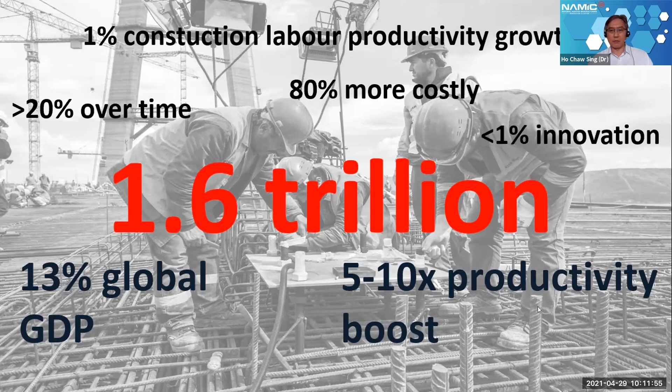While there are barriers to higher productivity, ways of overcoming them have been known for some time. Most companies, just like any in other industry sectors, generally lack both the incentives and the skill to change. However, there are forces that are lowering the barriers for change, such as rising requirements, increased demand in terms of volume, cost, and quality, disruptive new entrants, more readily available new technologies such as prefabrication or precast technology, new materials, as well as automated processes such as concrete 3D printing, and of course, increasing cost of labor with partial restrictions on migrant workers.

One of the solutions for the industry is to move toward an automated manufacturing production system that would boost productivity up to 10 times, potentially. Construction or concrete 3D printing has progressed rapidly in the last few years.

Construction 3D printing offers the following: it facilitates greater off-site manufacturing, vastly reducing on-site construction. It enables modularization and standardization of construction processes. And most importantly, it requires less workforce in a more controlled and safer factory environment.

In Singapore specifically, efforts have been underway in the last few years to explore the adoption of this technology as part of the digital transformation that is now rapidly changing the landscape for most of our major industry sectors. On this note, I just want to thank again all our distinguished speakers today for being here with us to share their insights on the pathway towards adoption of construction 3D printing technology.

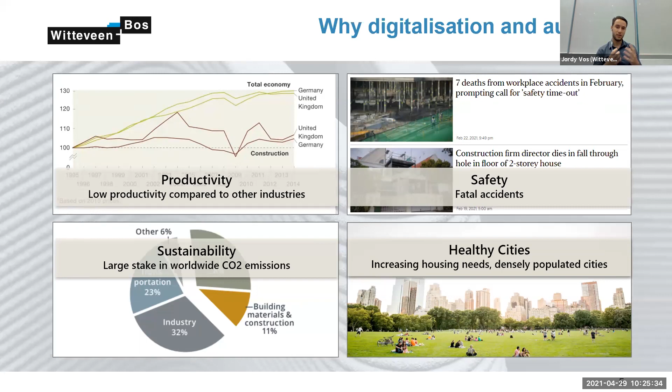There is an increasing need for housing worldwide, and increasingly densely populated cities. So we need to create more healthy cities where it's pleasant for everyone to live. And 3D concrete printing is a great solution because it can help solve many of these challenges.

It's an automated construction method with a high amount of productivity. There's less human involvement needed, which helps greatly to increase safety.

It is a technology that makes use of material in a very efficient way, and therefore it's a sustainable construction technology. Also, we don't need formwork, for example, which allows us to create more freeform shapes and more pleasant and appealing cities for everyone to live in.

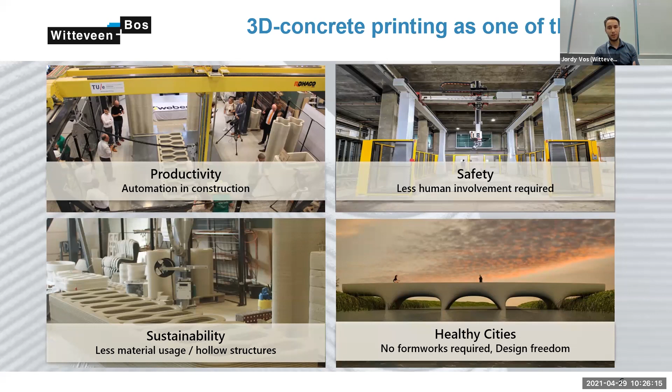So let me give you a quick introduction to how 3D concrete printing works, for those who haven't seen the technology yet. First of all, 3D concrete printing is a robotized technology. It's basically a robot that is moving a printhead, and it can be all kinds of robots actually. I'll show some examples later on.

This printhead is extruding concrete that comes from a mixing pump, building up a concrete object layer by layer. This is all controlled by a robot controller, and the robot controller receives input from the digital designs that we, as an engineering firm, create.

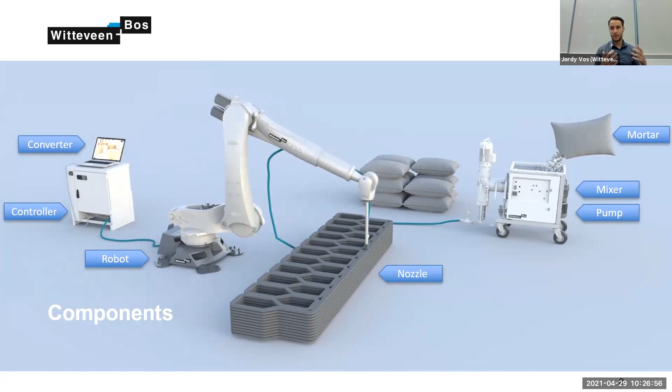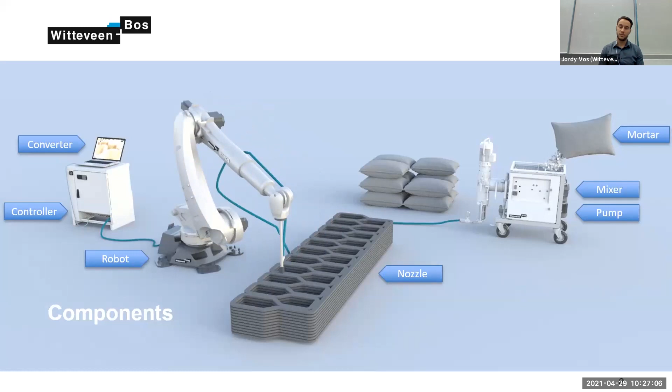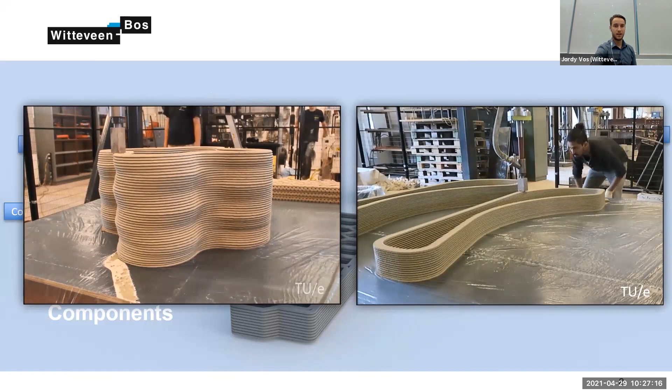So we have created a full digital workflow from the digital designs of the buildings, all the way up to something these robotic systems can read. And if you do that correctly, it looks something like this—we can print complex shaped objects layer by layer, hollow structures, in a fully automated way.

So why is 3D concrete printing sustainable and smart? Well, let's have a look at the traditional way of doing construction. We are looking here at a typical workflow to construct, for example, a concrete wall.

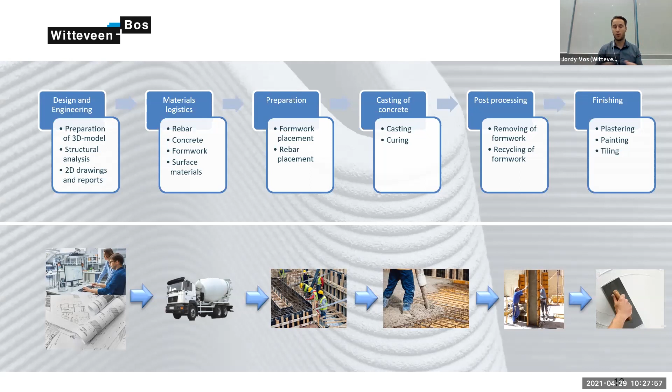This is an even more simplified version of it, but just to give you an idea, there are a lot of different steps to go from this design to a finished product. All those steps require a lot of manual work, a lot of what I call analog work. It's not digital. Moreover, it's done by a lot of different people who all have a different skill set to do these steps.

So, summarized, it's a very segregated process with a lot of failure cost in between because the processes don't connect well to each other. Also, because all those steps are still very manual, it's labor intensive and not human friendly. And because we make use of, for example, formwork, we have a lot of material waste.

If you look at the 3D concrete printing process, it's a very smart way of doing manufacturing because it's a much more simplified, integrated and connected process, where we go way faster from design to the actual manufacturing process with way less manual and analog steps in between.

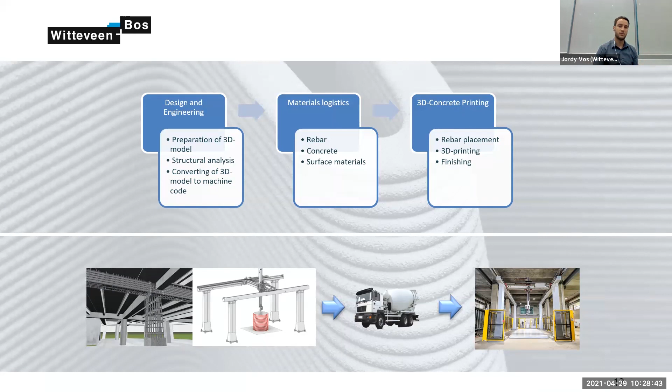So this is what you can imagine the future of 3D concrete printing to be, where we have 3D concrete printing systems that don't only do the printing, but also all the additional steps needed to reach that end product—think about the placement of reinforcement, surface finishing, painting, tiling, and so on.

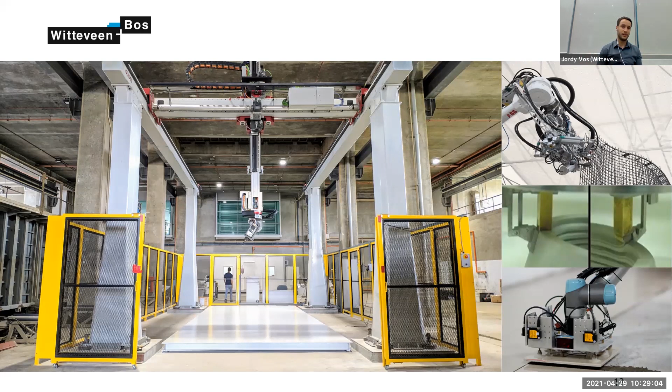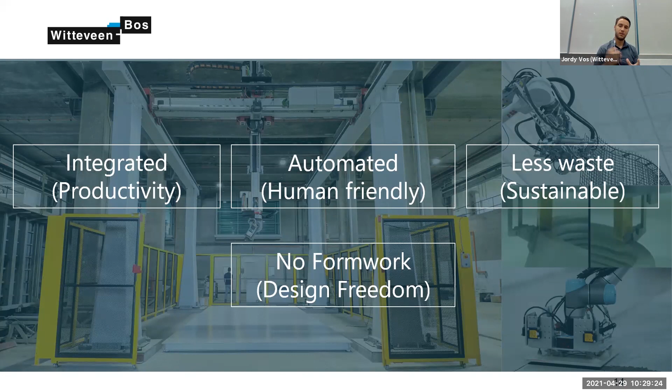That process is fully integrated, which helps greatly to increase productivity. It's automated, which helps create a more human-friendly way of doing construction, and it's very sustainable because there's barely any material waste. And because we don't need formwork, we have way more design freedom, and it helps create healthier cities.

So let's zoom in a little more on the manufacturing of housing. What are the benefits of 3D concrete printing for housing? I will go through four benefits. If you know more benefits, feel free to drop them in the chat.

First of all, like I just mentioned, it's a highly automated way of doing manufacturing. This helps a lot to produce houses faster, with less labor and less raw materials needed, with all the advantages I just mentioned.

But it can also help a lot to create lightweight building components, as you can see here on the screen, which again helps reduce materials. This is really needed to create those cities, to help accommodate the increased housing need worldwide.

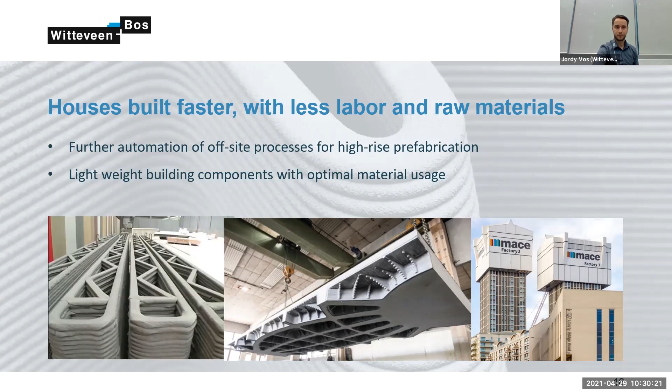3D concrete printing has great design freedom, which helps to create shapes for houses or buildings that blend in better with green and natural environments, avoiding pure concrete cities. That is a more pleasant environment for everyone to live in. On the left you see one of our visions of how 3D concrete printing can be applied in high-rise buildings, and on the right a hotel in Singapore which isn't produced with 3D concrete printing, but if you look closely it actually looks like it is.

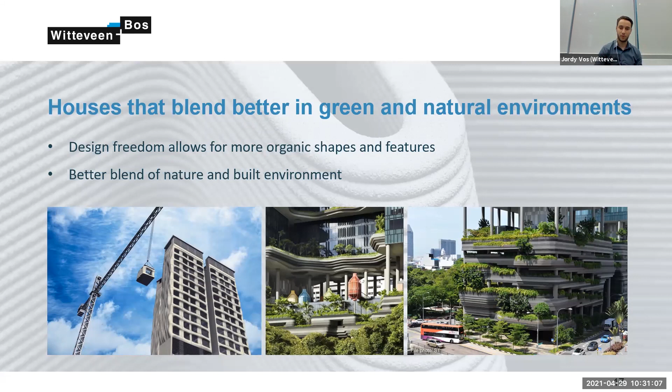So 3D concrete printing can really be used as an architectural feature in building designs. Besides that, it's a great method for design freedom. We don't need formwork that you have to repeat to earn back, and that gives us the possibility to create tailor-made houses. I think this mainly works for lower-rise, one-off buildings.

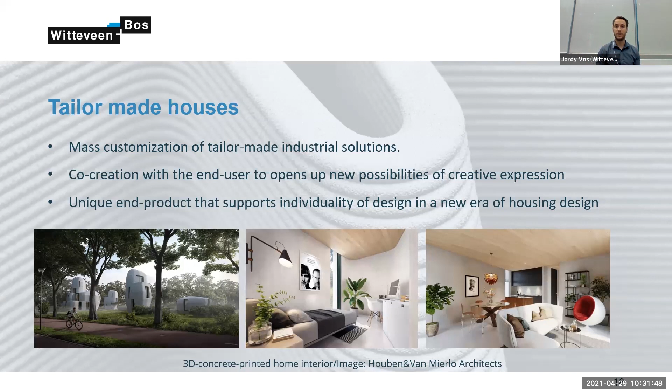But this really helps everyone express their creativity and create that one house they would love to live in. Tomorrow is our press release for the Milestone House in the Netherlands, where the first house is being constructed, and that will be a house where someone can really live - an approved load-bearing structure, for example.

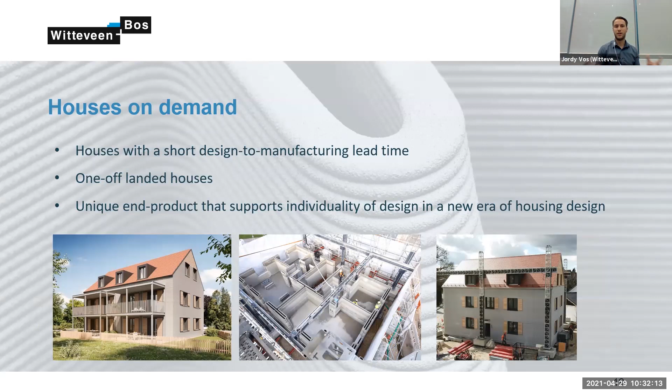Also houses on demand, because we have this very efficient workflow from design to manufacturing. We can create houses when they are needed, instead of waiting 6 or 12 months before the design is finished and construction can start. This really helps create those one-off landed houses that are needed in many parts of the world as well.

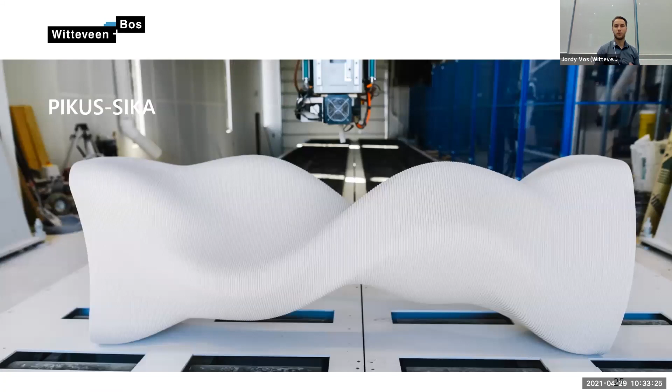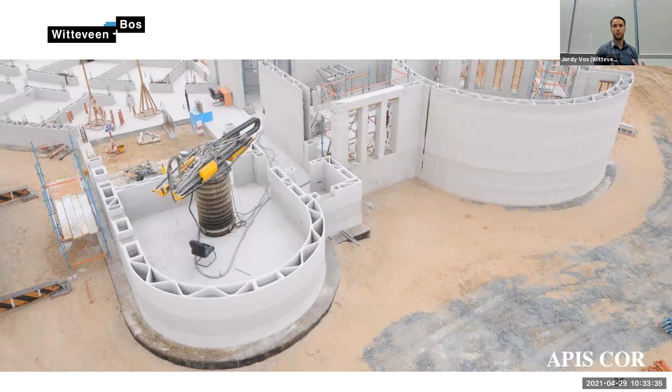Besides that, the equipment used for 3D printing is becoming bigger and bigger. This massive frame you see in this photo is actually a 3D concrete printer. The machinery is also becoming more advanced and integrated, with different processes connected to each other, and you see specific types of robotics being developed purely for 3D concrete printing.

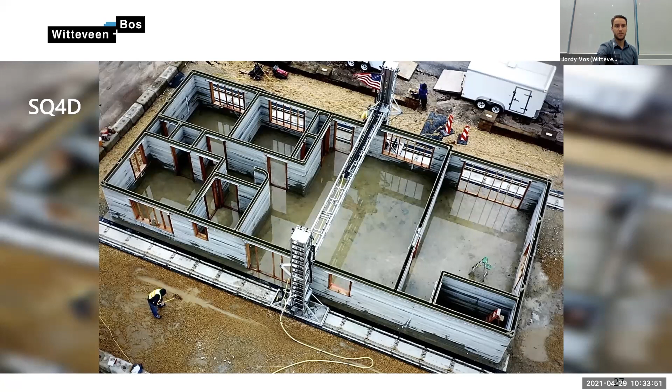You also see pilot projects getting bigger, with more happening all over the world right now. I think that line will continue, and making it more mainstream is also really needed. So I often get the question: is 3D concrete printing the future of construction, and will we see a 3D printer on every construction site? I definitely think it is the future, but it will exist alongside existing construction methods, like prefabrication, which is also being highly digitized nowadays. It really depends on the needs of the project which technology suits best, just like in any other manufacturing industry.

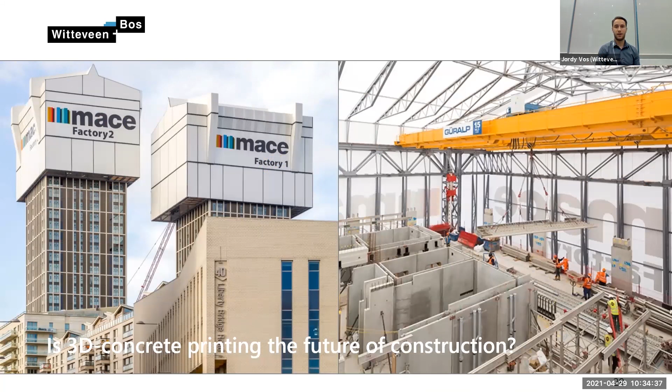They can even be combined, so certain parts can be prefabricated and certain parts 3D printed. This fits very well with how construction is being transformed right now into a more industrialized, factory-type manufacturing.

Besides that, the technology will also become cheaper over time. This is something we've seen in other 3D printing industries, basically everything besides construction, where first the cost of 3D printers and printing processes become more affordable over time, and on top of that the speed and productivity of these technologies increase. It also has to do with the fact that the more a technology is deployed, the more competition is created in the market, which helps reduce prices, and because of that demand increases. So it's a kind of endless cycle that really helps make the technology more affordable.

Besides that, there is a strong relationship between the material, the printing process, and the designs. To create safe structures of high quality, we need to standardize this relationship and understand what happens if we use this material with this type of process and this design. So all of that is being standardized, and that's also one of the components that is highly needed.

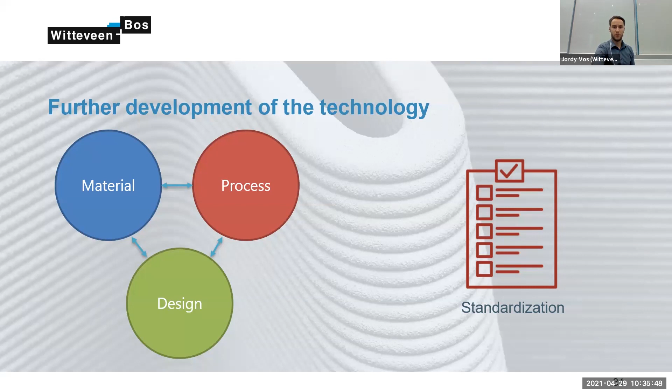And we need to find the right applications on the short term and on the long term of 3D concrete printing. In which projects and in which applications is 3D concrete printing feasible, desirable, and also viable. Here we need to look for opportunities where the advantages of 3D concrete printing are at the right place. And even when 3D concrete printing in the short term might be more expensive, those added values can offset that additional cost, and you can do something that, for example, cannot be done with traditional construction methods. That is where the biggest opportunities are for the short term.

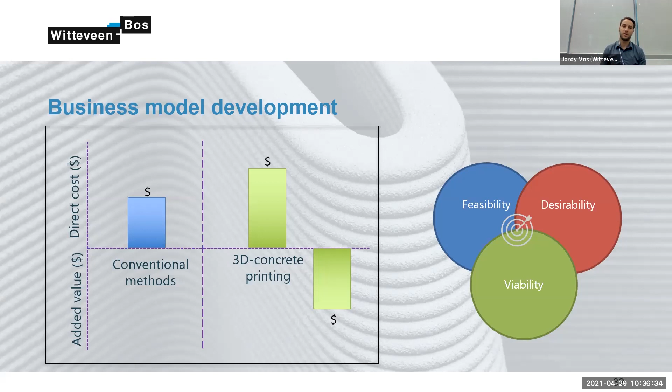Jordy, really amazing. I can see that you're clinging on to this whole area of technology that you and Witteveen+Bos is pushing. I really wish you a lot of success in the areas that you are developing this very well. And very inspiring as well to see the progress that you're making in this 3D concrete space. So congrats and keep going.

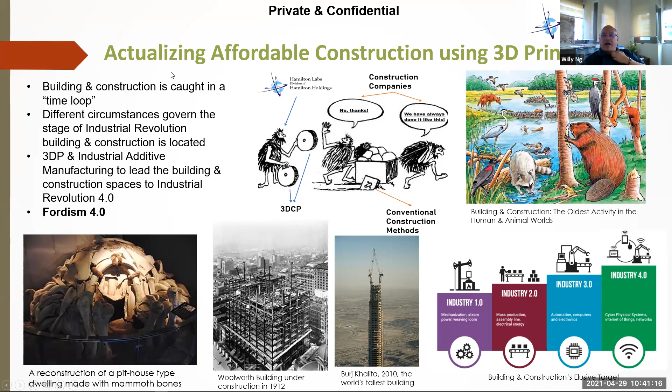Again, to highlight the topic, actualizing affordable construction using 3D printing, I can't help but mention Fordism. Fordism was founded by Henry Ford way back in the early 1900s. What he pioneered was the modern model of mass production in the auto industry. When I was in school, many years ago, my professor said how Henry Ford sold his cars: you can have any color you like as long as it's black. That highlights the deep standardization of his product. Now, standardization of a product means you can mass produce it at a price so low that a common man can afford it, and I think to actualize affordable construction, this Fordism is something that can play a role in the consideration.

Another effect of Fordism is the use of special purpose tools and equipment via the assembly line. Jordy earlier talked about robotics, showed pictures of large scale 3D concrete printers. That is part and parcel of the special purpose tools.

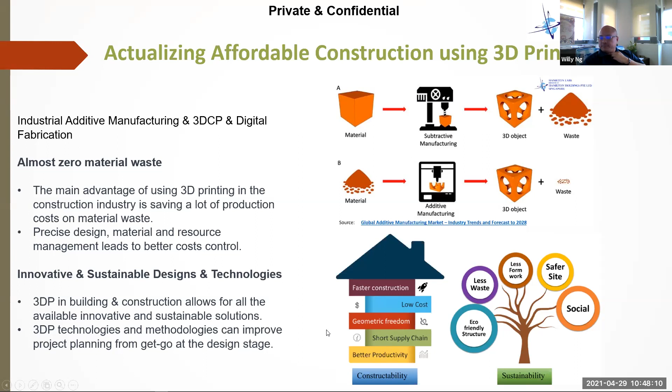You already mentioned earlier geometric freedom and sustainability. Then we talk about the delivery system. The tools that we deploy along the production system are naturally the 3D printers. Now, 3D printers come in various forms, as Jordy presented earlier. You have the robotic arms, which provide more flexibility.

I used to say the robotic arms can be made to do the most complicated Pilates positions. So it improves the production system. Then you have the concrete 3D printers, which are the gantry 3D printers, which make standardization easier because they behave exactly like a production line. So there is potential for cost savings from additive manufacturing when machining, molding, casting, and tooling are not required. So I think the delivery system, the printer, is a powerful tool and equipment as part of the assembly line.

And again, we go back to design, which I think Mr. Wong talked about earlier, which is design for manufacturing and assembly. Earlier on, I talked about the DFAM, which is design for additive manufacturing. So again, I fall back on the fact that design is critical.

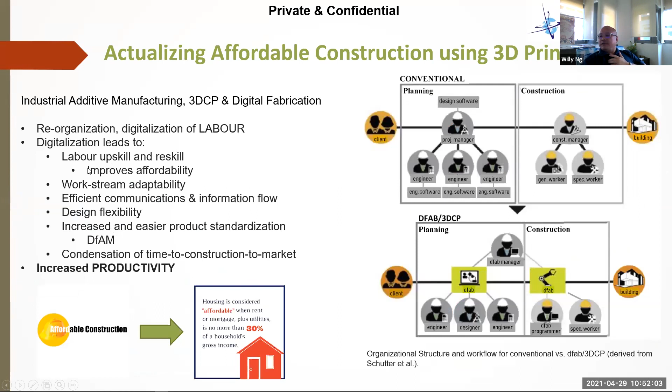Again, I go back to this slide where affordability is defined with new skills and new talent. It builds up affordability, because with improvement in income, the affordability goes up.

3D-CP also highlights the importance of integrating and collaborating across the construction industry's value chain. It cannot stand alone. That's why over the last 14 months, the pandemic, we at Hamilton Holdings explored different materials, like Mahendra mentioned. We went into metals, which we are looking at for 3D printing facades and molds to cast the facades.

So the whole value chain has to be integrated. And with integration comes further standardization, which then allows the realization of affordability to happen. Now everything has to be scalable, and that's where standardization comes in. It's important to be able to standardize the product. Again, as Henry Ford said: you can have any color you like, as long as it's black. That's how costs come down with standardization.

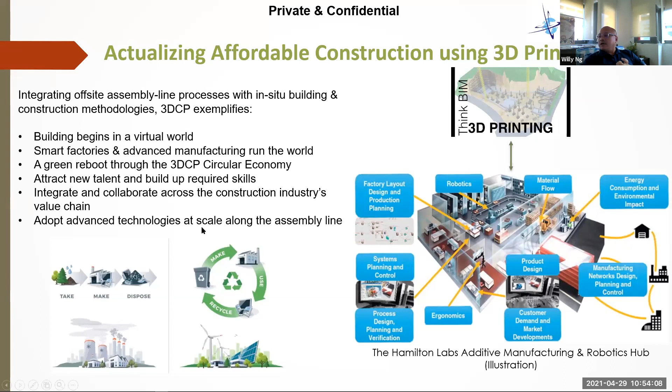Now, at the same time, I also want to talk about a case in point, which Mr. Wong talked about as well: the PPVC, prefabricated pre-finished volumetric construction, and the PBU, prefabricated bathroom unit. Again, this is a strong move towards standardization, because the public housing space in Singapore is all about standardization, and that's a strong move towards lowering costs. According to BCA, it improves productivity up to 40%, and this is without 3D-CP even being involved in this process yet.

There's a better construction environment, because it's fabricated off-site and assembled in situ. Then of course, with fabrication off-site, it improves quality control.

Now this diagram is Hamilton Holdings' vision of how a production line for PBUs and PPVC will look, where it resembles a lot an automobile production line, where robotics come in to do finishing work, where robotics come in to cure, where robotics come in to even do 3D printing, which is a very good possibility and part and parcel of the finishing process of 3D printing.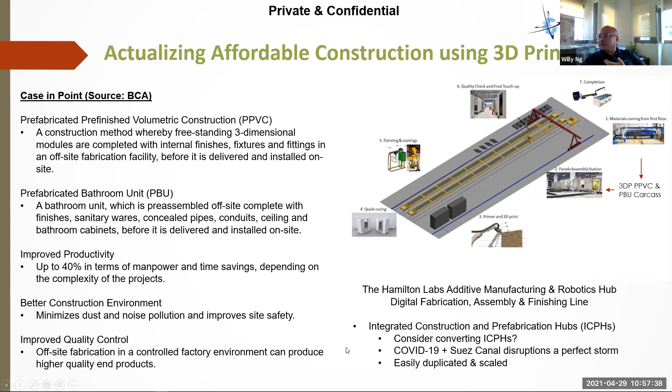So this is the end of my presentation. I welcome any questions towards the end of this seminar. Thank you.

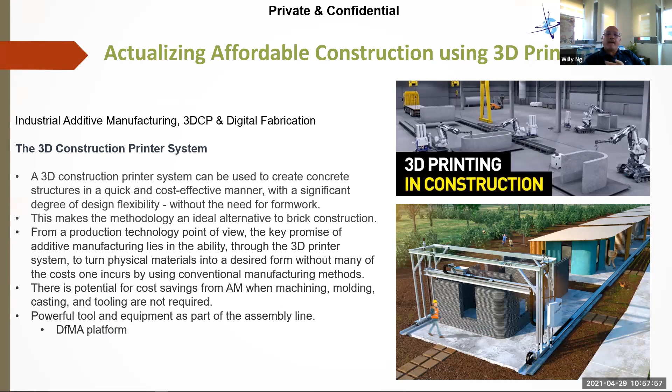Willy, thanks so much. I can really sense your passion here. You've been in this business for quite some years, and I think there's more we can actually harvest from all of this passion that you have to push the industry further.

So next up, we have another highly driven thought leader who has loads to share with us, Mr. Sam Ruben from Mighty Buildings. Sam is the Chief Sustainability Officer and co-founder of the company, which uses 3D printing technology, new composite materials, and robotics to manufacture houses. His passion and deep understanding of sustainability and compliance drew him to the vision of addressing the housing affordability crisis by 3D printing sustainable homes. This has resulted in Mighty Buildings producing the first UL-listed 3D printed building component, being the first company certified under UL 3401, a new standard for 3D printing in construction, and the first housing unit utilizing 3D printed components to be certified at the state level in California. I'm not going to steal your thunder, Sam, so let's hear it from you.

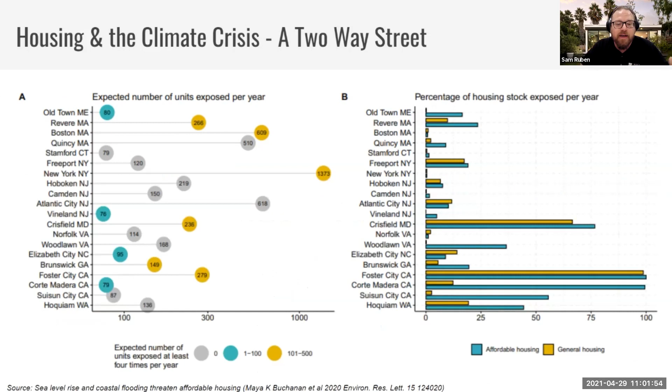Even while we're seeing these impacts in terms of sea level rise, flooding, fires, and bigger storms causing greater devastation, this is impacting all of the housing in some communities. Foster City, just south of where I am in California, has almost 100% of its housing stock exposed every single year to climate impacts, particularly from sea level rise and fire.

At the same time, construction accounts for 11% of all global warming emissions for the construction phase. The building energy use phase is another 28% of all global warming emissions. And neither of those accounts for the carbon generated by waste during construction or at end of life. So the impacts of the built environment are even beyond what we're seeing here.

And it's not getting better. The simple fact is, at a time when we need to be decarbonizing our building stock to get to zero carbon buildings, we're actually seeing that we're falling further and further behind where we need to be. So what this really speaks to is the fact that we need a better way to build.

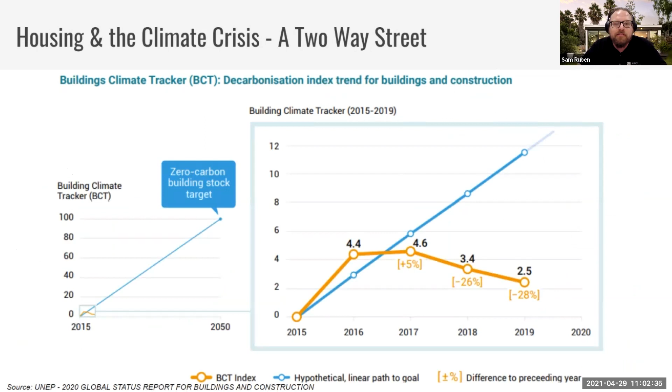This is something that I, and we at Mighty Buildings, feel really strongly about: that 3D printing has a huge role to play. That's why it's been so exciting, just in the last 6 months or the last year, to see the new developments coming onto the market, such as the multi-story building that was printed in Dubai.

Or what's been done in Germany, or what we've seen down in Tennessee with the first 3D printed building facades that incorporate insulation, as well as what we're seeing here in California, Texas, and New York in terms of bringing 3D printing into the residential market.

At the same time, as has been mentioned tonight, the regulatory environment is incredibly important. The simple fact is that the building code exists because it's written in blood. These regulations are there because things went wrong and people got hurt and died. So it's incredibly important, as we rush to take advantage of the new opportunities 3D printing presents, that we're doing so in a way that demonstrates safety.

We need to build out that regulatory structure and standardization that can help building officials feel confident that a 3D printed structure is not only going to be safe, but is going to last for years and go above and beyond code. There's been some great work with UL that we're particularly proud of, helping them develop their new UL 3401 standard, which is the world's first standard for the investigation of 3D printed building construction.

There's also been the ICC acceptance criteria 509 for the use of 3D printed concrete, which was originally approved in 2019 from work with Contour Crafting, and was recently updated for multi-story use cases in concert with Black Buffalo, another 3D printed concrete company out of New York.

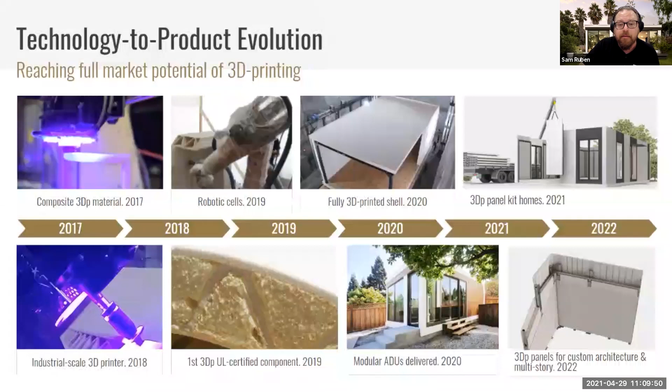What you're seeing here is the printing of that first prototype fully printed shell. Again, this was in our old facility in Redwood City.

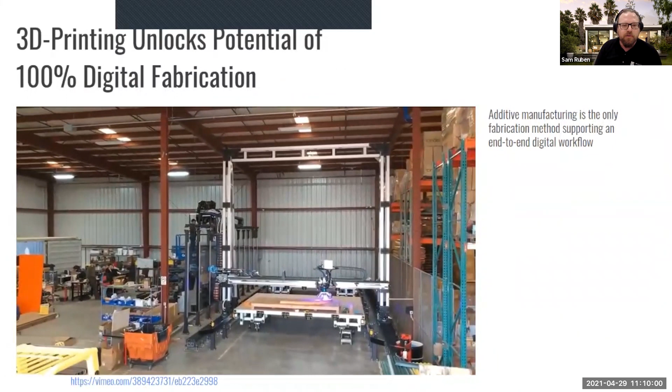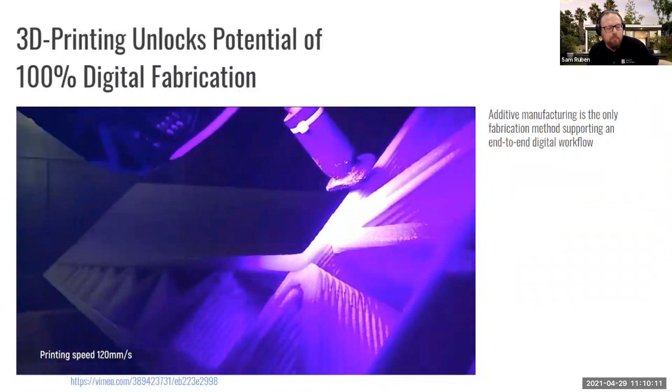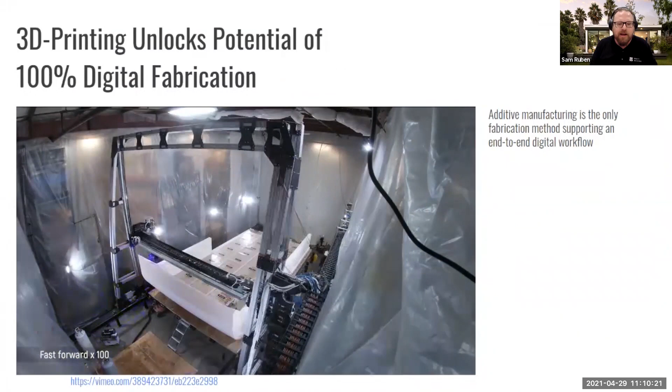We've now moved into a 79,000 square foot facility in Oakland, out of which we can generate 300 units a year, 360,000 square feet of production, which we're upgrading our system to expand to 1,000 units a year, or 1.2 million square feet of production out of that same 50,000 square feet of production floor. The other 29,000 are storage and office space.

What you're seeing here is a single print cycle. We were actually able to print this entire shell in 24 hours. What you can see is essentially a synthetic stone that's been printed using similar honeycomb patterns and cellular infill to what you've seen in others.

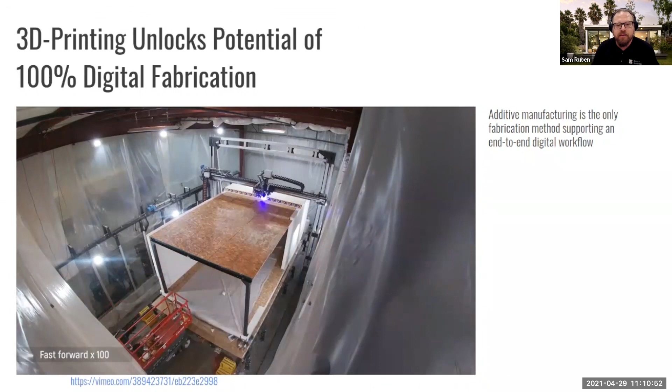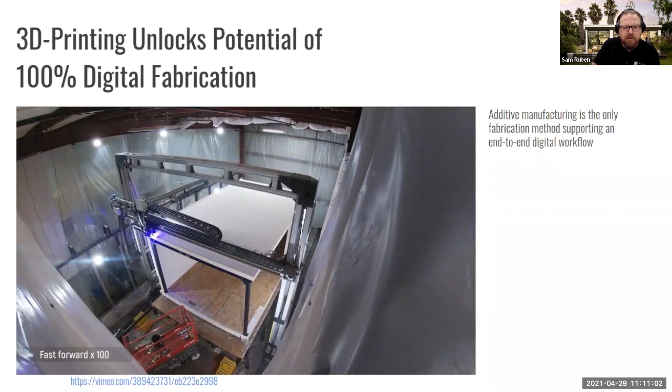One of the advantages we have over 3D printed concrete, at least to meet code here in the United States, is we don't have to stop and reinforce it. One of the things about 3D printing in the US is, in order to qualify under building codes, you still have to reinforce it - pour additional concrete. So it's kind of robbing 3D printed concrete of some of its promise because of those code requirements. Unfortunately, we in San Francisco and the Bay Area know particularly well what happens when you build with unreinforced concrete in seismic areas - it does not end well, hence why reinforcement is required.

One of the things we're excited about with our new technology is that we're moving forward with the fiber reinforced version of our material, which is going into certification. That creates the ability to have a similar size beam to a reinforced concrete beam, but with about 20 times better tensile strength, equal or 2 times better compressive strength depending whether you're long or across the fiber, all while being 4 times less in weight and 4 times better in insulation. That's something we're really excited about as we move into multi-story - the ability to eliminate the need for steel rebar and other materials, and really focus on decarbonization through dematerialization.

As has been spoken to by both Willy and Jörg, 3D printing also unlocks the potential for Industry 4.0 and these ideas of digital fabrication - buzzwords that are thrown around, but with the new technology that 3D printing provides, they're actually achievable. The simple fact is, as Willy did a great job demonstrating, your file never has to leave the computer. Here in the US, we have to print it out to get permits, but that's the only time.

That means not only can you incorporate design changes late in the process, you also have the opportunity to do things like advanced simulation, which means we can run a simulated build thousands of times before we ever get to that first prototype, saving new product introduction speeds by as much as 5 times faster, and as much as 100 times less in terms of cost.

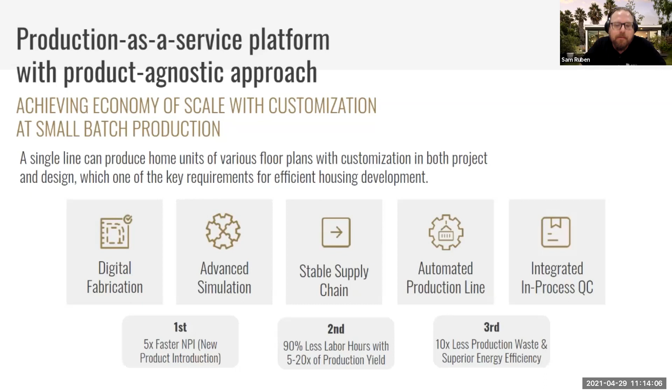And the other great thing is the ability to integrate in-process quality control on a level and scale that you just simply can't do with traditional builds, ensuring a much higher level of quality while still having that automated production line that can run 24 hours a day.

So our goal at the end of the day is to be a tool for industry. We want to help unlock the productivity necessary to solve the housing crisis, while also addressing the climate impacts of that additional housing to make sure we're not exacerbating the climate crisis.

One of our first steps into that is the new Palari Villas project, which we recently announced, to be placed down in Rancho Mirage in the Coachella Valley here in Southern California. This is the world's first zero net energy 3D printed community. These homes are incredibly energy efficient, but also incorporate solar as well as battery backup, to ensure they're generating as much energy on site as they're using over the course of the entire year.

This means that on the production side, because of the avoided waste, we're able to save 1 to 3 tons of carbon, depending on whether we're in California or another state, since California has much stricter end-of-life recycling and waste diversion requirements. We're also saving about 400 kilograms of carbon a month from the energy generated on site, and providing savings of over $100 per month to the average Californian.

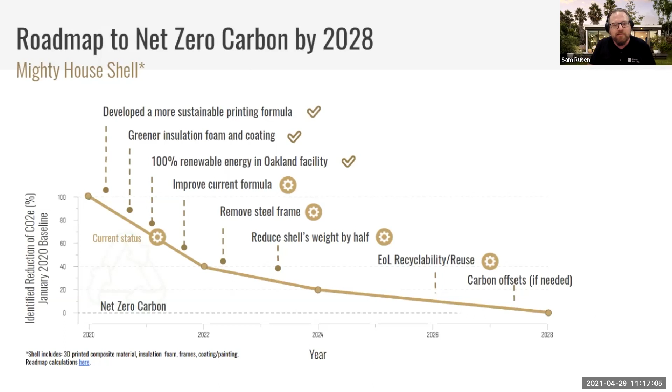We're really helping to drive the construction industry to embrace new tools and new ways of doing things, because the only way we're going to continue to thrive as a species while building all the housing we need is if we do so in a way that minimizes, or ideally even turns those houses into solutions for, the climate crisis. So really excited for the panel discussion and your questions.

Yeah, okay, so the added value of architecture and construction through 3D printing. I'm an architect and business development manager at BASF Forward AM. And I always like to start with this one, even though in this round you probably know much about it already, the maturity of 3D printing.

This is a study from 2018 looking at the different components in construction for 3D printing. We all know bridges, we've seen it today. Bridges have been addressed so far, with blue meaning development has been done and it's basically growing and continuing to develop. And I think houses are, let's say, at least for Germany, also a big step.

You've probably seen the first printed residential building in Germany published at the beginning of the year, but also the certified building. This is actually a big step, I think, for this technology to break through, that you can really offer it on the market. This is very important, especially in Germany, where you have a lot of regulations. For molds, it was meant that this is already fully developed, but I can show a bit more later, there's still room for improvement.

For sure, architectural models, every architect knows it's a standard technology we use. Interior design, I find very difficult, there are a lot of one-offs. We also did a lot at NowLab, but let's say really serial production or integrating it into interior design as more than one unique design, which really nice designs are possible, I've not seen yet. And the building components, which I'll talk about more today, is also for me a very interesting topic, because it's not about printing the whole building.

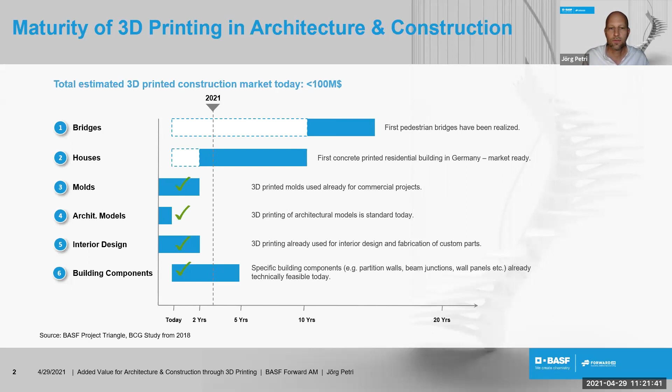I always talk about a digital craftsmanship. We have heard it also today, like really bringing back this craftsmanship idea on site, which has vanished from building sites because of costs and labor intensity. I see a potential of this printing in combination with parametric design possibilities to bring this digital craftsmanship back on site.

So 3D printing clearly enables you to realize your individual project. This is a concrete facade panel that we made, created through a mold that was 3D printed. So printing the formwork for your custom-made concrete facade, that's basically the idea. On the right-hand side, you see the mold.

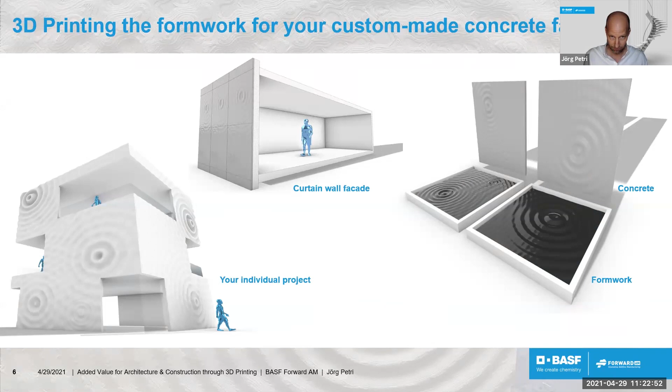We're all familiar, and you can use this in exterior or interior. But for me, the important part here is that you really see a shorter lead time through this coherent digital process chain that combines the digital planning processes with production. This is very important. I've been working at UN Studio, and they've been using digital design for quite some time.

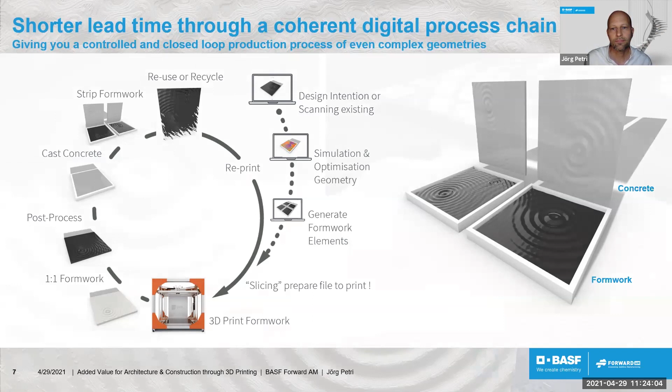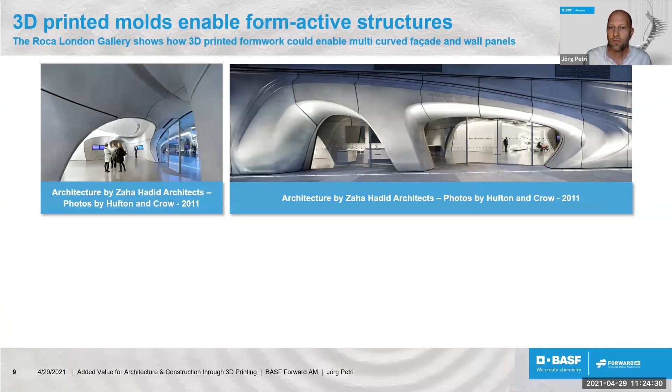This is a project from Hadid from 2011. There, 3D printing was not used. If we would do this today, the forms for that would probably be printed.

And this gives me an intro to this form-active idea of structures. Really using the geometry to enable a design that uses less material, less concrete, maybe not even reinforcement, because it's all pressure based. And then you can even serially make these unique parts. For me, this is a very interesting part of making these form-active structures, producing less concrete, therefore less CO2 emission. That's really a perfect fit for 3D printing.

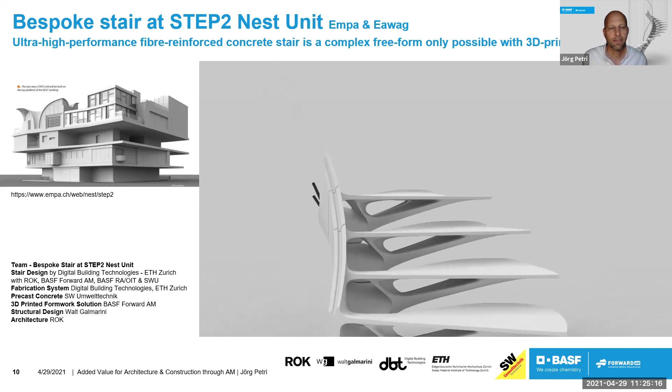If we look at this, we have created, together with the ETH team and a big team, this step, which is actually a form-active step. It saves up to 50% of weight due to the geometry. This is a project we're going to realize next year, with the fiber reinforced, ultra-high performance fiber reinforced concrete stair—it's only one part of this unit. You see all the teams involved.

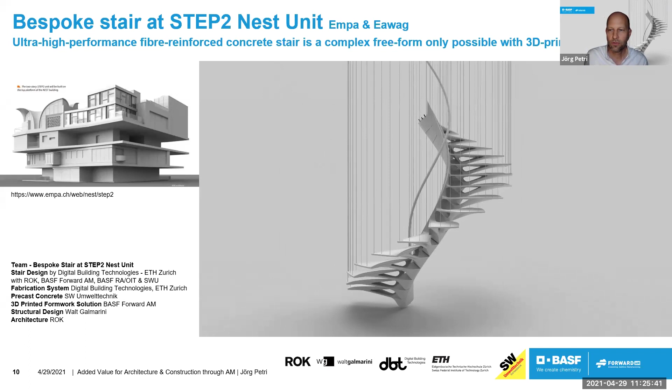It's a very nice co-creation project between different partners. As mentioned, the geometry is not only a really nice design, it's a form-active design which doesn't use classic reinforcement. Therefore you can actually make these forms, and it reduces the weight by 50% compared to a conventional staircase.

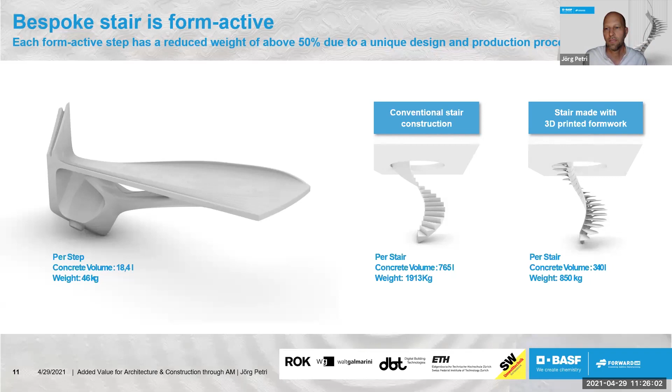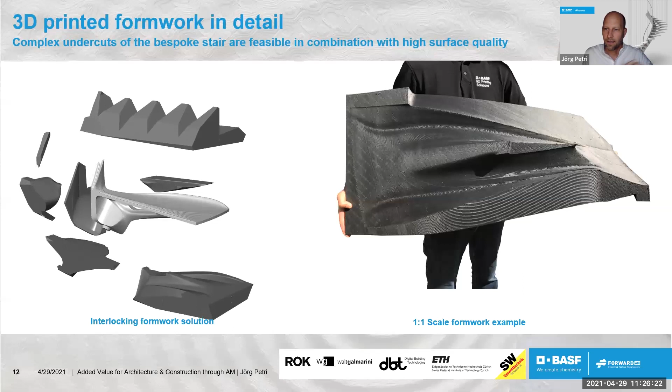So here you see the mold that we created, one of the bigger parts, just to get an idea of the scale and also the complexity. This can, I would say, only be done with 3D printing. Using other technologies here, like milling, to do these complex forms creates a lot of effort to turn them around and work on them from different angles. That's why 3D printing here really makes sense to create this unique structure.

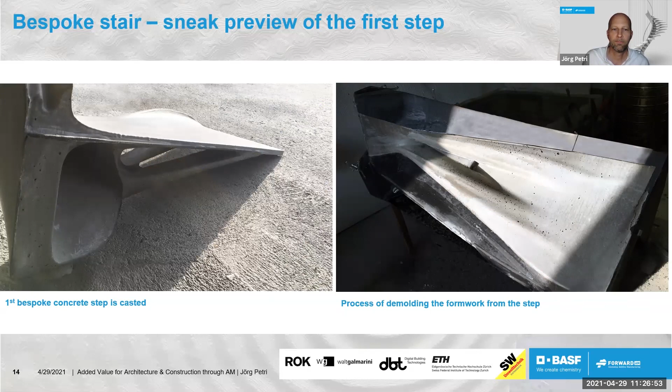So really enabling this digital craftsmanship, this is for me a key for 3D printing to be established on site and to enable these unique structures we actually need in order to be sustainable in the future.

Behind these really nice images, there's really engineering solutions that we offer here at BASF Forward AM. So we can create the molds from any geometry. We do partly structural analysis, and we also do scanning of parts.

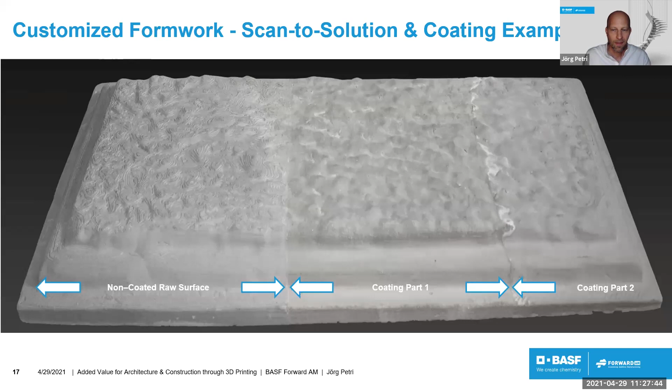So basically we can also work in reconstruction, replacing existing parts, fitting in inserts into a facade. Also here with different surface qualities, we've scanned an embossed stone detail of a building.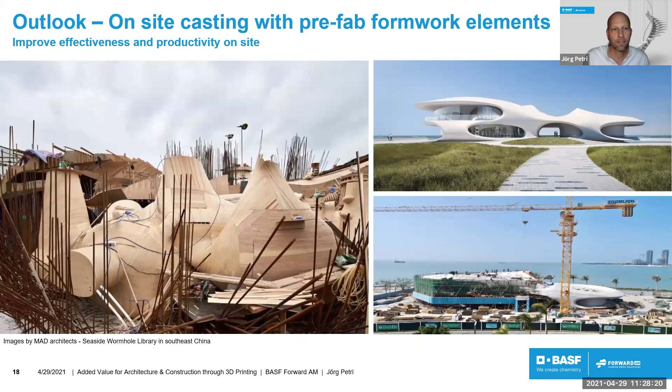And for sure, as an outlook, we want to go also more on the large scale on-site structures. This image really shows a project from MAD Architects in China, that this craftsmanship is very nice, but on the other hand, also not affordable everywhere. And it takes a lot of time to do this. So we want to make this process easier with ready-made forms that can be more effective and productive on site.

These are the key takeaways. I will just jump through them quickly because we will do the recording, so I don't have to go in detail.

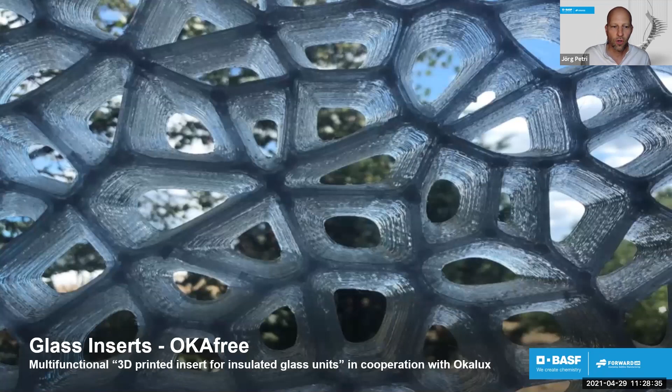So the glass inserts as a second topic, really nice. We work with Okalux together on this. It's a new way of guiding light and doing sun shading. Basically, it's an insert within the glass unit, within the insulation glass unit. And now through 3D printing, you can individualize this.

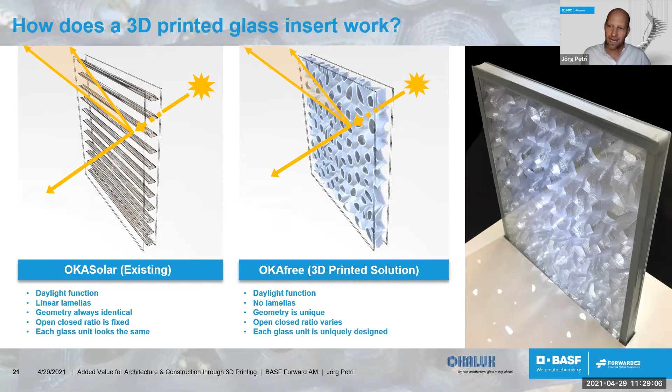So the function is still the same. The outcome, on the right-hand side, you see it here behind glass. It's a sun shading device, but it also spreads the light due to the translucency of this material, and also guides the light in additionally.

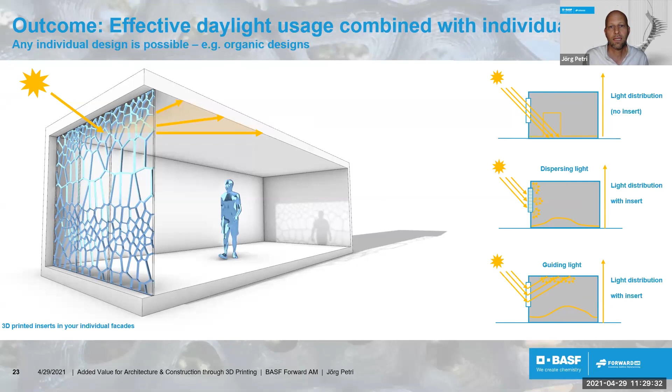This is how an example glass element looks like, that you then just build in as a standard glass into your facade. And it's protected within this glass, which makes it really nice. It's fireproof for high rise. It can be used in any location.

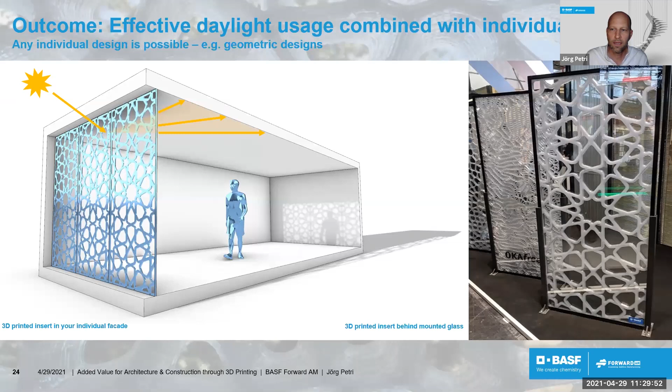So this is actually a product we have now established. You can use it to embed your logos. Also, we have a more reflective surface invented, or coating, that we can use, a metal coating that actually increases even the reflectivity.

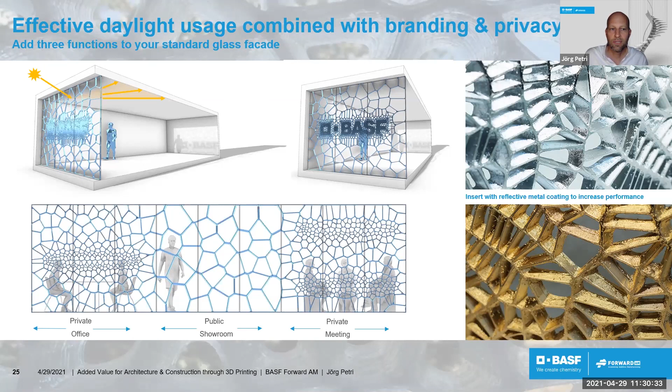And for sure, you can now fine tune your design according to the situation in your space. If you imagine a shop in the entrance, you can have privacy zones where you have denser design structures, and you have a public space where you want to show and where you want people looking in. So it's really individually possible to design this.

And also in the evening, when you light it from the inside or from the side, it really creates very nice effects. So yeah, this product is available, it can be built into your project. Basically, I'm quite happy that this is being developed now.

And the third I want to address today is really printing facades directly. We call it fluid morphology. We work together here with 3F Studio, which is a spin-off from the TU Munich. They have invented this idea, fluid morphology, from research now getting towards product level. They are responsible for the design and planning, and we as part of BASF Forward AM develop the material and produce the facade panels and enable the durability and quality of this product.

So the key thing about this facade is really that it's one element, and this makes it much easier in the end to recycle it, to bring it back again into the circular loop. So not assembling, let's say, 10 different elements from a facade that we normally know, but really having it in one element. So you could say it's like a low-tech solution for a multifunctional facade.

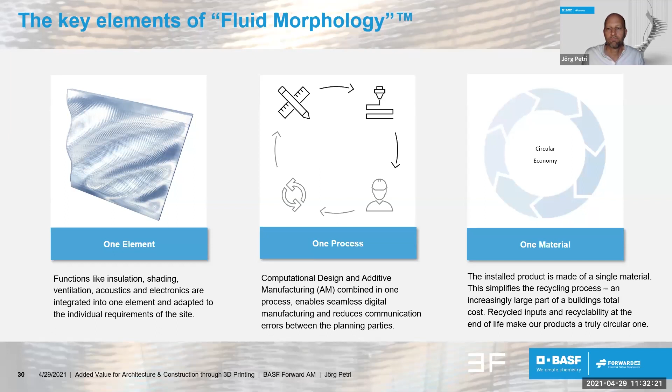And also here again, the process of producing and planning is combined, coming closer. You reduce communication errors between the planning partners by directly printing what you're planning and what you're anyway already designing in 3D. And you deliver it on site prefabricated.

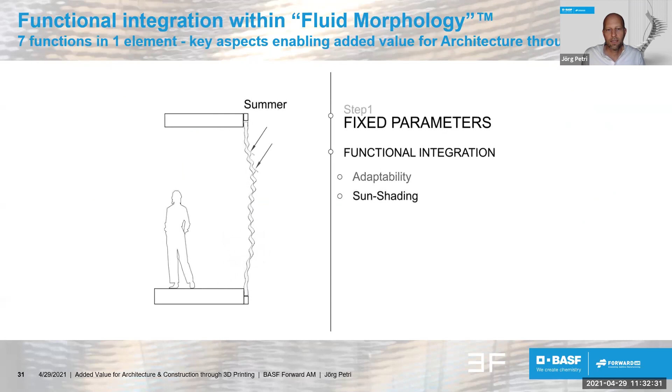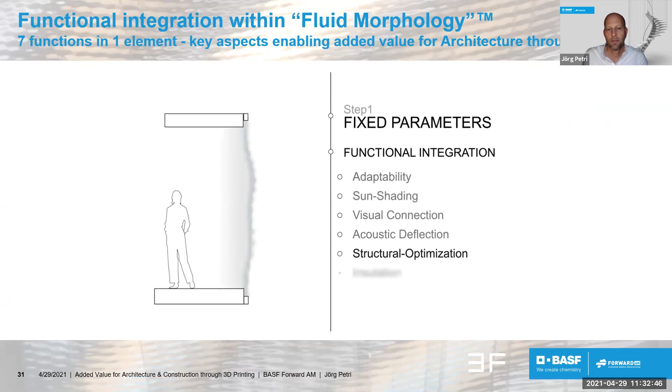So here the key aspects which are integrated in this facade: sun shading for sure, the visual connection, acoustics, structurally it's optimized within. You have the insulation already as part of the component, and for sure ventilation.

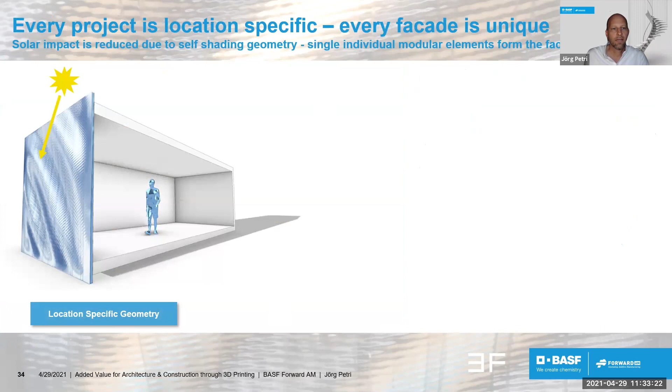And why do we have this geometry? Why do we have these waves? Every project is location specific. Every facade in the end is unique. This is possible through parametric design now. So you really locate your building and calculate the facade according to the sun angles that will hit the building.

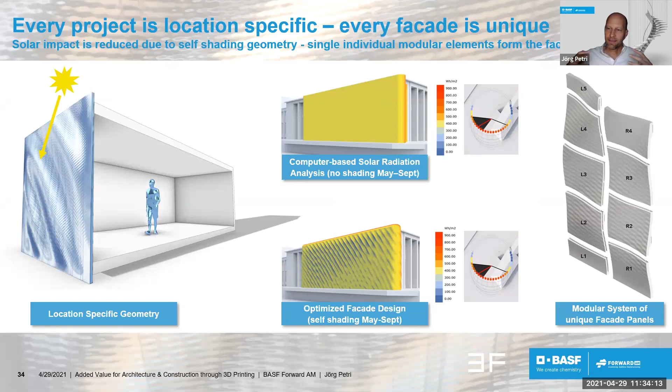So BASF has done some solar radiation analysis, comparing a flat facade to this wavy facade, and you see the blue areas which indicate there's less energy impact onto the surface. So this is actually the reason why these big waves are there. It's kind of like an integrated sun shading, a brise-soleil, which is basically part of the whole facade. And this is only possible now through parametric design and computational design, bringing these elements together and jointing them in a proper way, while still having this individual design. This cannot be done feasibly with any other technology.

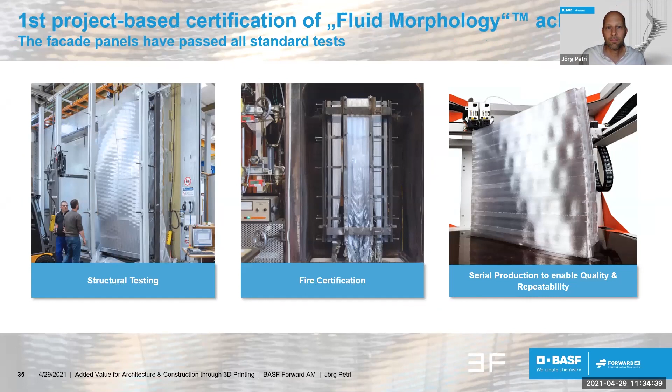We have gone through the certification process for one project. So basically you see the structural testing, we did the fire certification, and also built up the serial production that enables repeatability of the quality that you need.